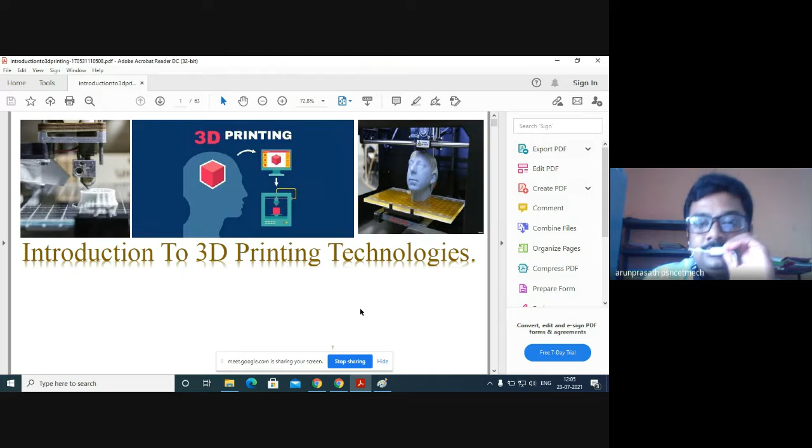Now we are entering into the concept of 3D printing technology. I hope my screen is visible to you. Before we enter into the concept of 3D printing, we need to know some basics of it.

You people may be aware of so many concepts related to 3D printing nowadays. You can see it anywhere, or in any application areas you can hear people speak about 3D printing. So guys, before we start with the concept of 3D printing technology, we must understand what is 3D printing.

In earlier days, people used to draw components by means of scales and pencils. There were specialized persons called mechanists. That mechanist would draw all the components of elements we use nowadays, for example connecting rod or piston, whatever it may be. These connecting components were drawn using scales and pencils.

But then later, people discovered so many design softwares like AutoCAD, SolidWorks. Nowadays we use Creo Elements, and Autodesk Fusion 360. So all these softwares were developed later.

In the initial stage of this area of design, people had only two dimensions, X and Y. We could draw whatever image or component, but it had only two dimensions. Later, people developed further stages through technological development.

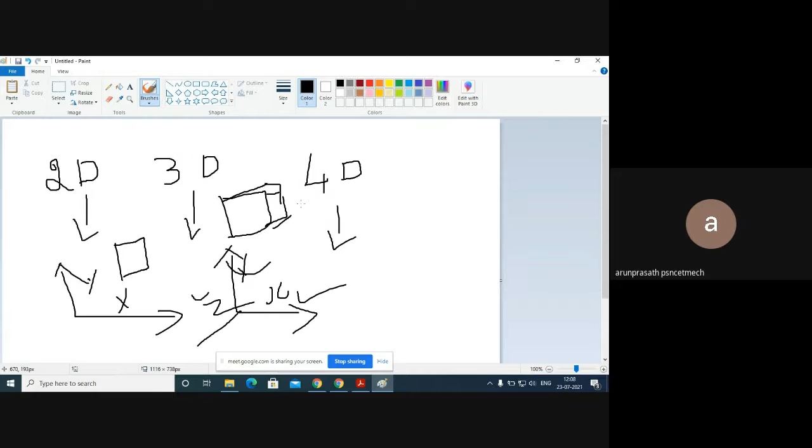3DP technology is where we see that component in three directions, X, Y, and Z. In these three directions, we can see how the component is really available or how it really is after the design stage is completed. Because we simply design in the design stage, giving all the dimensional details for the drawing. After the dimensional details are given for the drawing, through this 3D printing technology we have that model in our hands.

Once we see the live model, we get an idea of whether we need to improve any design changes or not. We can see the component lively, and then only we have that idea. So for that purpose, people initially developed the concept of 3D printing.

3D printing is also called rapid prototyping. This 3D printing and rapid prototyping both have the same meaning, but these two come under the concept of additive manufacturing. Additive manufacturing is the principle, and 3D printing is the application of that additive manufacturing.

Now the trend is 4D printing. 4D printing is where we print following the same process as before, up to the design stage. But after the printing is completed, what happens is the material gets deformed.

You people have heard about shape memory alloys. Shape memory alloys are where we can apply any disturbance by means of heat or by means of a cold environment, and it turns to deformation. If I apply heat, it will deform. Then if I apply reduced temperature or a cold environment, it gets transformed into a newer position, or it comes back to its original position.

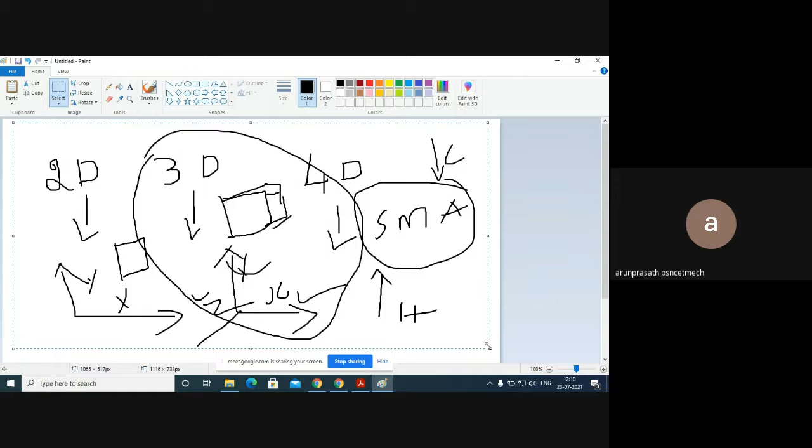Introduction to 3D printing technology, where I give you the basic introduction. The reason people prefer this 3D printing technology is to visualize the component of the design. Once we have a component in our hand, we have some idea. Another important thing is that 3D printing technology doesn't require a big structure at all.

While we see our 3D printers, it looks like a common printer what we use in our office. The process is completely changed, but it just looks like a small printer. We can print the component instantly.

This technology is very new, and we have the outlook that it is possible to get the component exactly as it is. That is the main advantage of this 3D printing.

Then we can reduce the material wastage. Once we are moving with our normal machining process, because you people are from a mechanical engineering background, you may know about the basic concept of machining, whenever we are going to create any component.

For example, we can take a lathe. In that lathe, if you are doing some shaping, you can do plain turning operation, turning operation, or facing operation, whatever it may be - it happens only due to material removal. I hope you people understood what I am saying.

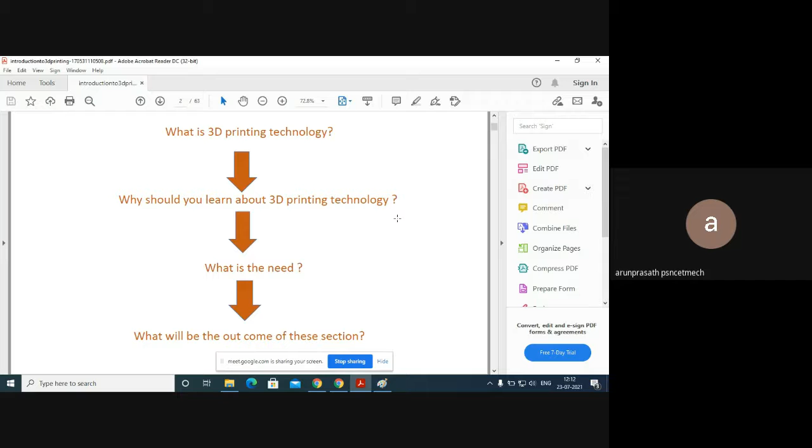It only follows material removal. If I want to put a hole with a drilling machine, there is material removal, and the hole happens in that piece of material. But this 3D printing technology is not like that. This is called additive manufacturing technology, a technique which helps to reduce material wastage.

That other technology is called subtractive technology. We will discuss this difference between additive manufacturing and subtractive manufacturing in the forthcoming slides.

Now listen, this is the history of our 3D printing. 3D printers were first introduced by Hideo Kodama, a researcher and scientist from Japan, where he discovered this. He first coined the name 3D printer in the 1980s in a Japanese lab.

The first 3D printer they introduced is called fused deposition modeling (FDM), in the 1980s. Later, by 1984, Chuck Hull, who worked at 3D Systems Corporation in America, discovered a stereolithography machine in the year 1984.

This stereolithography machine uses photopolymers. Normally, photopolymers are polymers which can be easily cured with the help of ultraviolet rays, because ultraviolet rays are lasers - we can easily cure this polymer at the time of printing.

This is some basic history of our 3D printers. Later, so many techniques were developed. Initially they started with fused deposition modeling, then lithography was introduced, then within that, laser sintering was introduced, then laser stereolithography, then inkjet printing technology. There are so many printing technologies introduced using laser, and many technologies introduced later.

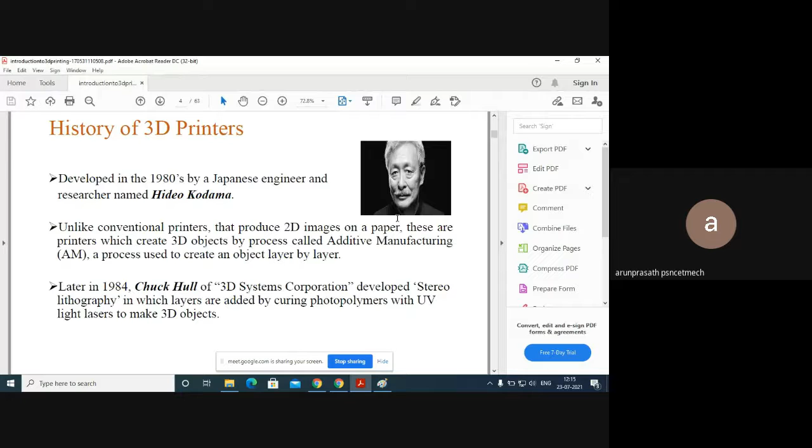First, we need to understand what is the 3D printing technology, how it works. So guys, don't hesitate to ask any doubt with me. If you have any doubt, please share it with me in the chat box, otherwise in the comment box.

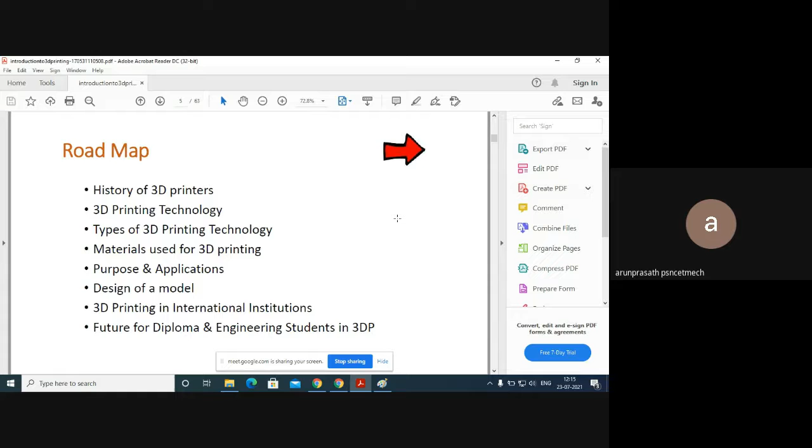This is the roadmap where we are going to see something about 3D printing in this video. Initially we discuss history, then technology, then types, what are the materials, then applications, then it moves with some of the areas.

By the 1980s to 90s, the 3D printing machine slowly entered into the real world of application. Initially only mechanical people, especially those working in automobile industries, created this component for their study. But later, by 1980s, and nowadays up to 2000, 2010, we are having this 3D printing technology in all of the areas. It's not limited.

You can take any field - you can simply enter into the aerospace industry or marine industry. Some small gadget components, people are developing using this 3D printing technology. These 3D printers have the ability to print metal also - that is called laminated object manufacturing. In this LOM technique, we can print simple metals also for our purposes.

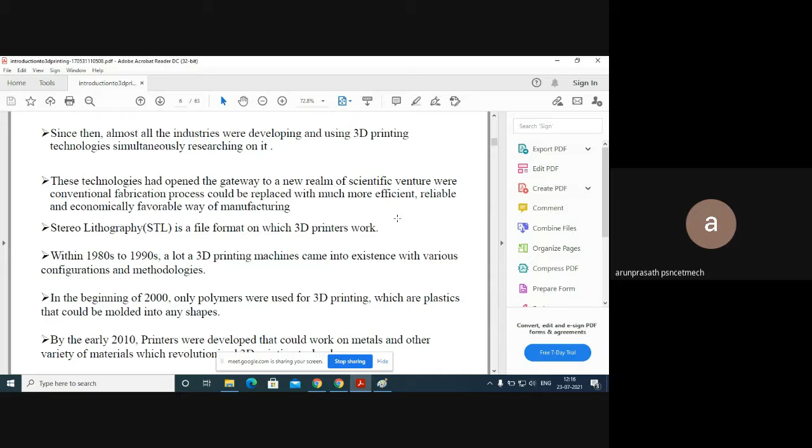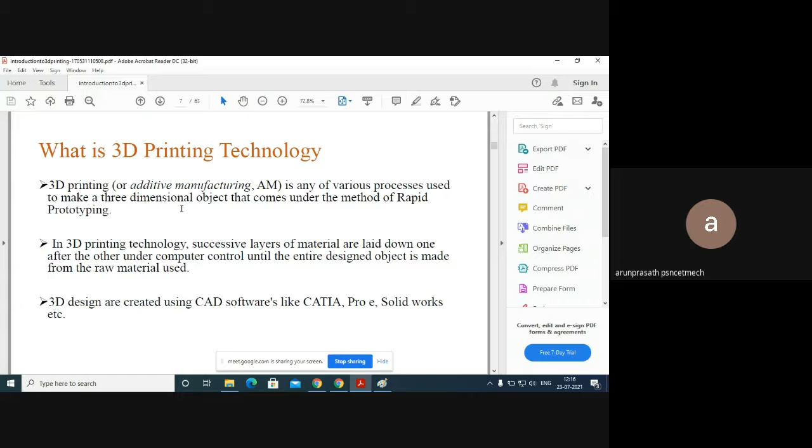Before going into the real concept, there is some basic procedure - how the 3D printing is developed. You people know, by means of this video, we have the 3D printer with us, we have the printout, the component outside and everything. But the real concept is there are two processes involved here.

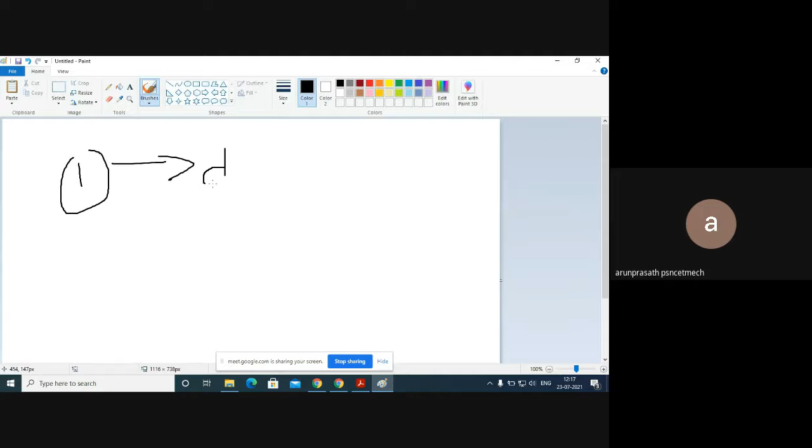Process number one is we just design our part. For the design of our part, we can use SolidWorks. Okay, we can use this... wait, I will just enlarge it. We can use SolidWorks, or we can use CATIA, whatever may be - CATIA, SolidWorks, Creo Elements, or Autodesk. So these are some softwares available for the design.

While taking this design, guys, we need to separate the design into two categories, because the software may differ based on the application, since we develop softwares based on application. So we have SolidWorks, Creo, and AutoCAD for the design.

After design is completed, we need to see the motion of the components, after the application. Before moving to the application, we need to analyze how much stress, how much temperature, or how much amount of load it can withstand. For that analyzing purpose, we have analyzing software, example ANSYS, CATIA, even though.

Then after all this is completed, we need to see the output by means of manufacturing. For that purpose, we are using CNC and 3D printers. So this is the hierarchy - once we follow this hierarchy, only then the total system is going to be completed.

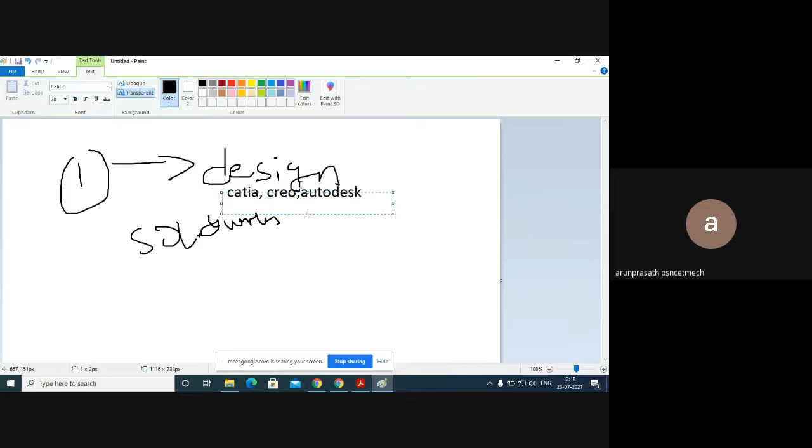Now listen to me. So first, we need to draw our diagram with the help of these tools. Once the diagram is completed, the second step is to import this diagram to a separate software that accesses the printer. The software is used to access the printer. Here only the design is completed.

Once this diagram is imported to the specialized software called Maker's Cura - one of the 3D printer softwares - we can extract information like how much amount of material is required, how much time is required, all the information, just like in CNC machining. Once you upload a component in CNC machining, you can see all the things in the display. Similarly, once we import the image through Maker's Cura, you can see how the image is printed, how much material is required, everything.

Not only Maker's Cura, so many softwares are available. Maker's Cura is one of the predominant softwares preferred by industries using this 3D printing technology. Once we import here, we can get all the information, then finally we can get our printed component.

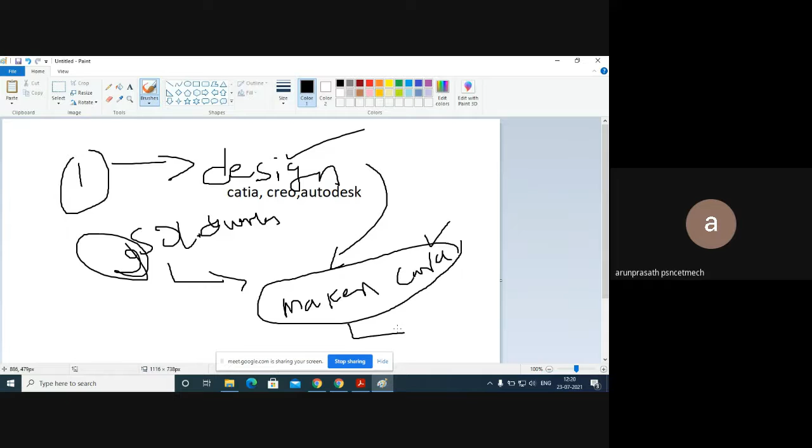The only drawback of this 3D printing is time. It took more time.

The reason for this is a concept called meshing. Meshing creates some internal structures, and you can see the structure is very fine, giving good compactness in the product. If the structure is very fine, the material strength is very good. If the meshing is not done correctly, we fail in the technology, and the material doesn't withstand the amount of load we require.

Creating this type of meshing in the component takes some time, because it creates a square shaped or honeycomb structure. So it takes time to create that structure, but then the build quality of the material is very good. That is the only drawback of 3D printing.

But if you want mass production, that is also possible. You can run with multiple machines. That is the only solution available so far.

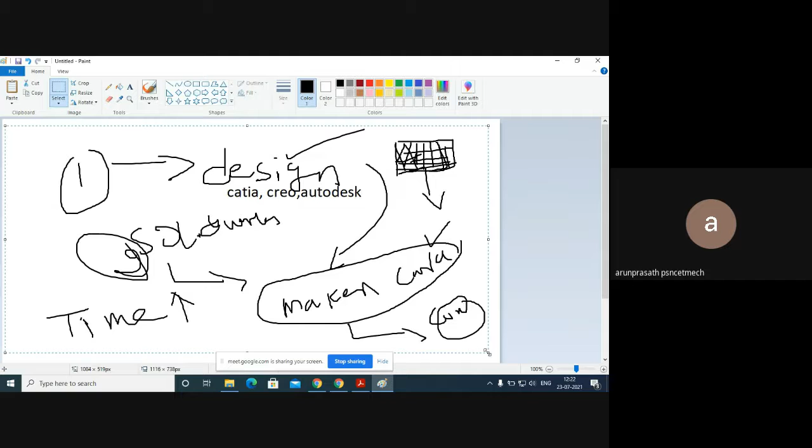So the first step is we draw the image with the help of some design software. Then we import that image through any of our 3D printer software to see other information like how much time is required for printing, how much material is required, what is the possible direction of printing, and everything we can clearly see through Maker's Cura software or some other software which can access our 3D printing. That is the image they give, first the virtual model, then the CAD model is imported.

Then it prints the object. For file preparation, each and every printer has its own file preparation. Normally the default file conversion is .stl. The .stl format is the format where we are saving our CAD files.

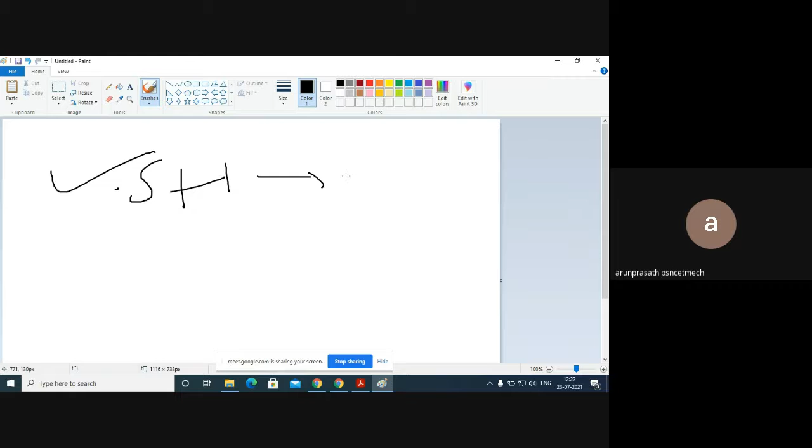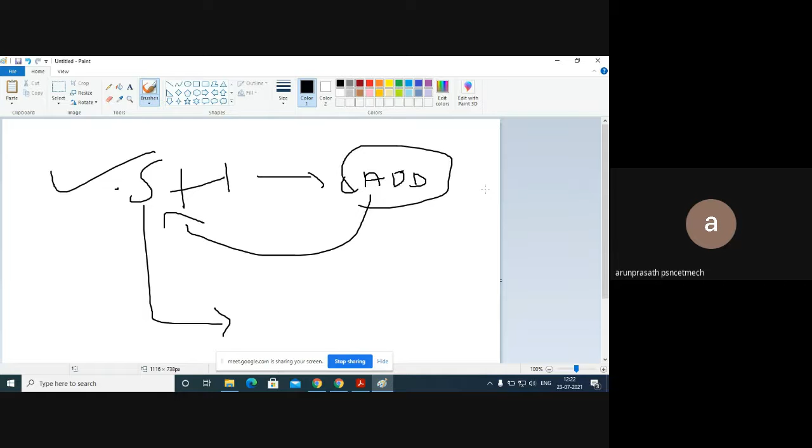CAD files can be stored in the form of .cadd or some other extension, where this file is converted to .stl. Then only it gets imported into the Cura software or whatever software we are using. So that is the concept of how they are creating it. Don't get confused, guys.

But nowadays the technology has developed where CATIA is interlinked with printers, where we can draw and directly connect the printer to our CATIA software and print it. It's possible, but only CATIA has the accurate license with 3D printer developers, where Cura 3D printing technologies give that access to CATIA, till now.

But in the forthcoming days, all the things will be very easy for us. We can expect this technology where there's a connection with all of our design software, with no separate software to split this into two stages. We can draw, and we can print through our printers.

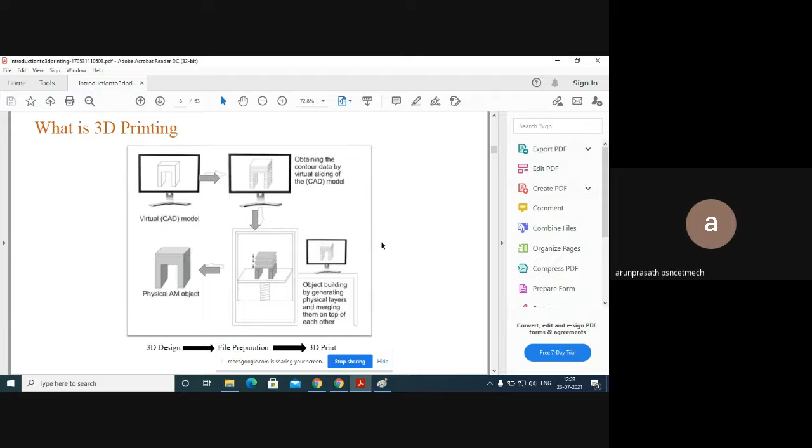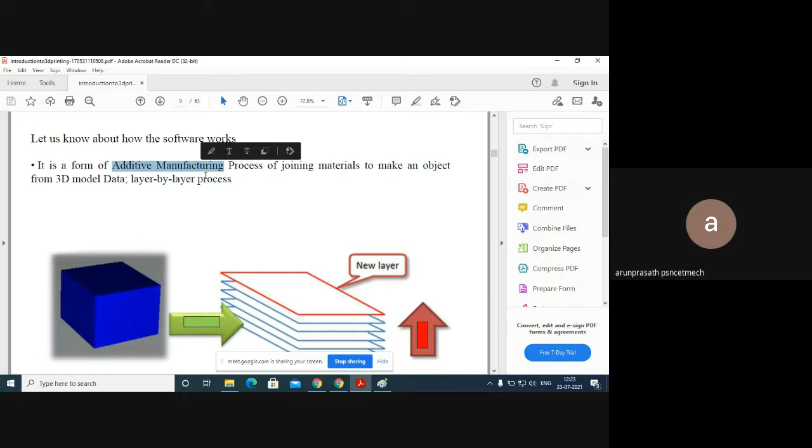So guys, this is additive manufacturing. Earlier in our video, we discussed the concepts of subtractive manufacturing and additive manufacturing. I'll give you a very good example: additive manufacturing is the technology where it creates objects layer by layer like this, including that meshing I spoke about.

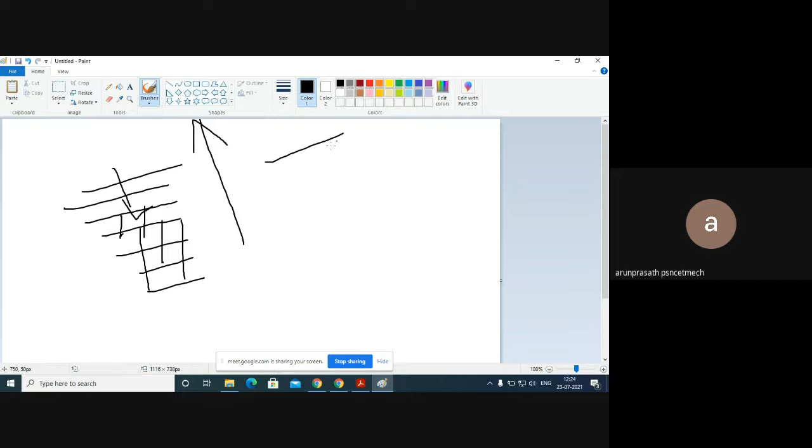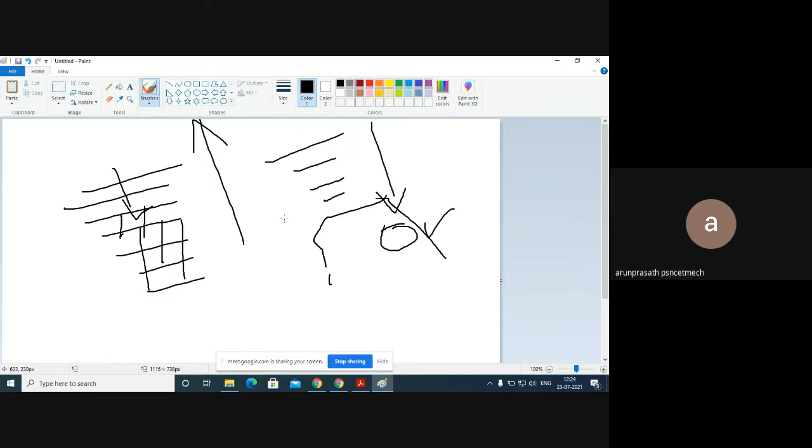This is called additive manufacturing, where the component is created like this. But subtractive manufacturing is like this, where material removal happens. After the material removal, we get the extra part as waste. Here there is no material removal and no excess material required for building. Only the material needed to build the component is produced. This is the difference between additive manufacturing and subtractive manufacturing.

Guys, that's the diagram where they are showing this. This is the complete model, showing the layer formation of the model. Then there's another technology, without doing drawing and everything - the scanning technology. Simply, scanners are available.

We can scan this technology, and people have implemented it in making prototype models. If I want to draw a statue, or print a statue of one of our leaders, we can use this scanning technology simply without drawing. It can give all the images, these images will be loaded on the screen, and we can easily print it through our printers. This is one of the technologies.

Then the material we are mostly using, guys - these 3D printing materials are preferred towards plastics. Plastics in the sense that plastics are classified into two categories: one is thermoplastic, another one is thermoset plastic.

So most of our 3D printing materials are plastics. Among these plastics, some biodegradable plastics are available like PLA, and ABS - these are biodegradable plastics that people mostly prefer, like PLA, ABS, nylon. But depending upon the application, guys, please listen, these materials may change.

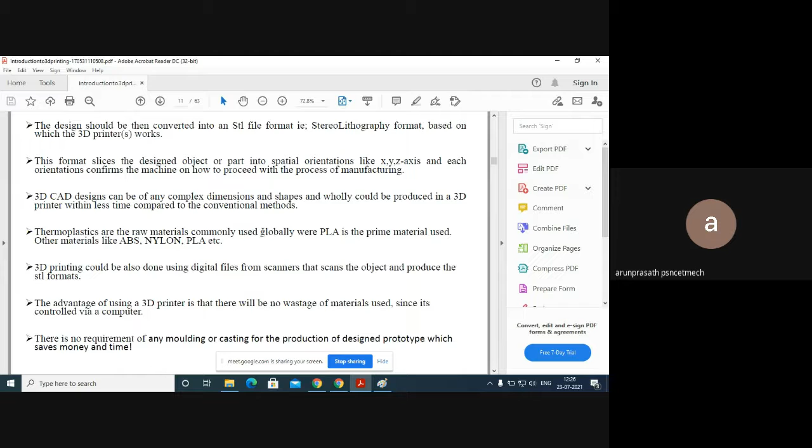I already mentioned in the introduction that we are using metals for printing also. This is some example for this one.

This diagram represents additive manufacturing and subtractive manufacturing. In subtractive manufacturing, material is removed - the required amount of material only stays back, and the remaining material comes in the form of waste. In additive manufacturing, there is no material waste. Obviously, compared to subtractive manufacturing, additive manufacturing has very less material waste.

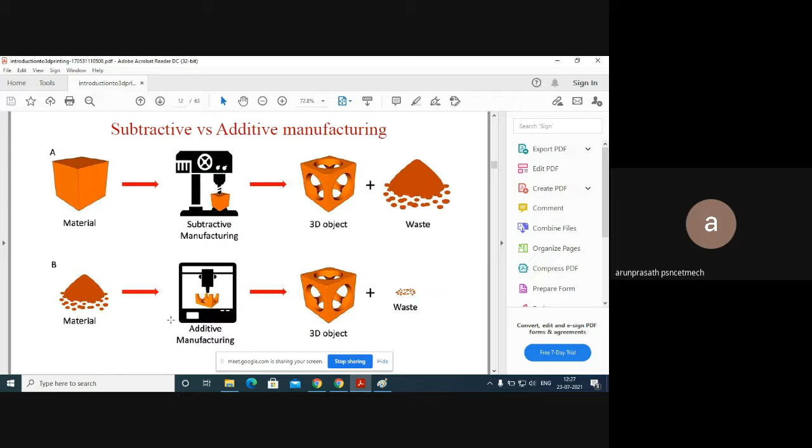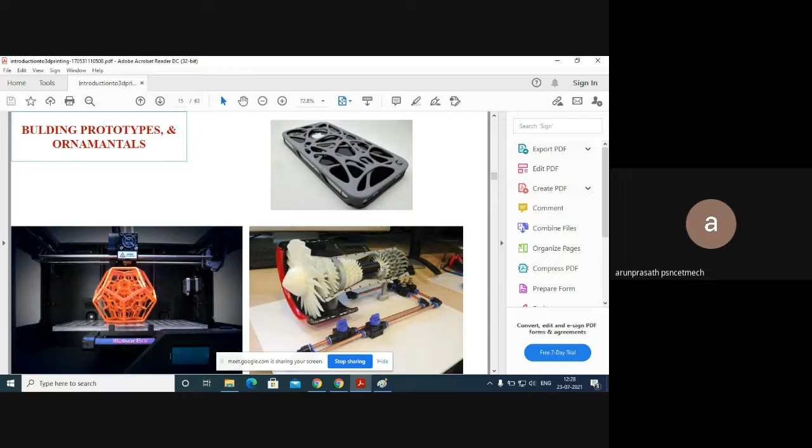This is a 3D printing prototype of a turbine, where we can use it for the propellant of our rockets - so all these areas. They show some applications of 3D printing where we can have artificial bones also - we can create artificial bones and everything. Even the technology has increased where we have the artificial functioning of the heart also. I will show that video in the later slides.

Okay guys, please listen. The common 3D printing technologies are fused deposition modeling, laser sintering, stereolithography, and PolyJet. From these basics, there are so many components.

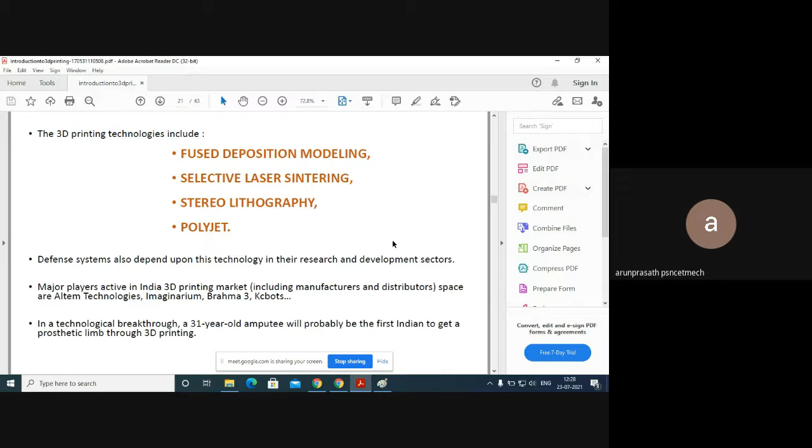That's why we are seeing the basics. The technologies we are seeing first is fused deposition modeling, where we have two extruders. In the two extruders, we simply have materials where the extruders absorb the materials and print it like this.

Then selective laser sintering, where we have a bath - in that bath, we have liquid polymers. We simply capture that image through a scanner or any design software. That image is imported, and the scanner passes the image towards that liquid bath. Once the laser is passed through, it is cured.

Then powder binding - the same technology, but instead of liquid we use powders. For binding we use lasers only. Stereolithography is where we simply dip the material into a resin, where we dip our component. Here also, laser plays the main role.

We simply directed the laser into that liquid bath, and that liquid bath printed the final component.

The resin is one of the polymeric materials. People use this resin for binders in the polymer matrix composites. Binders are agents which help combine materials, like a gum, so don't get confused.

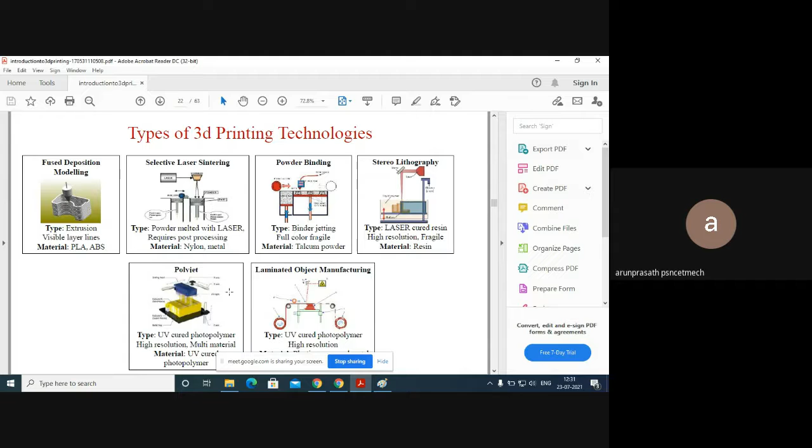In later videos we will discuss in depth what 3D printing technologies are available. Same concept, I'm explaining with the image.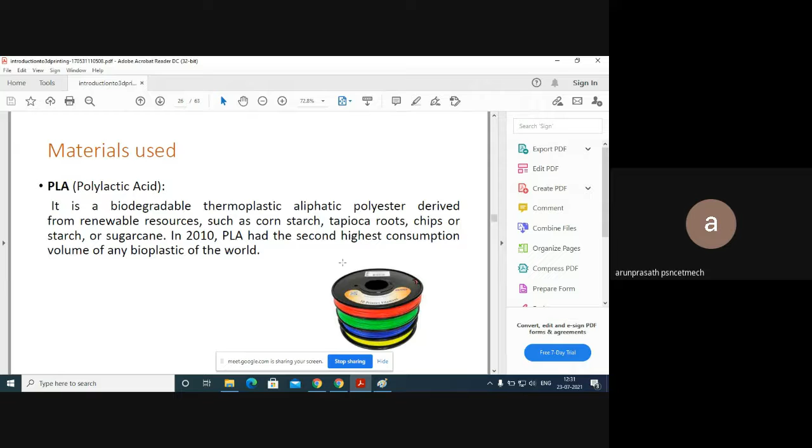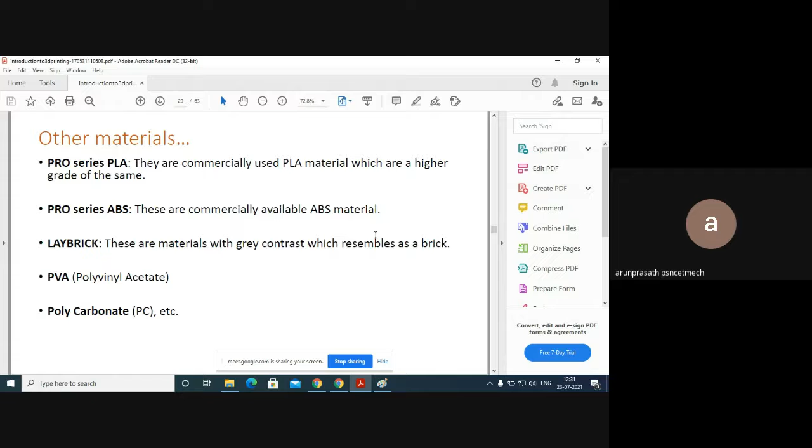The material normally preferred is polylactic acid. For 3D printing, most components use PLA and ABS. As I said earlier in the start of the video, the material may differ - there is no fixed material for this process. Based on the application, we can change the materials. There's no constant concept for the systems.

In the area of applications for 3D printing, we have electronics. We can manufacture sensors, PCB boards, and sensor mounting elements - everything can be printed with 3D printing models.

In the medical area, aesthetics, prosthetic arms of the human body. We can also print small pieces of bones and whatever may be needed in the form of replacement.

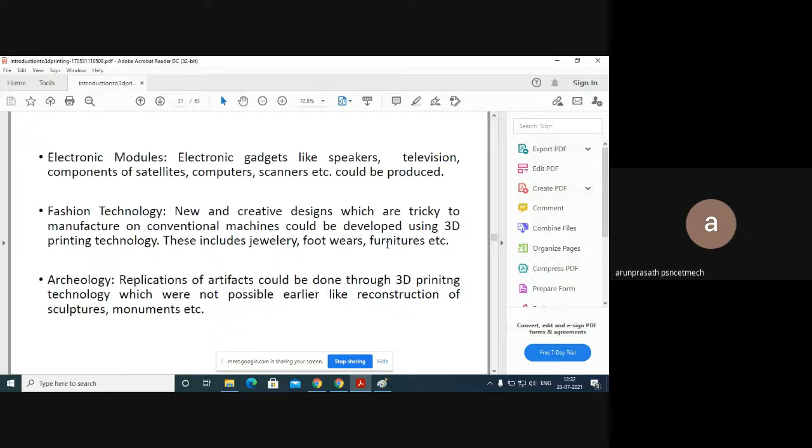These are some frontier developments of 3D printing technology, as well as in areas like fashion technology, archaeology, and automobile industry. The largest percentage of utilization of this 3D printing technology is in the automobile industry, then aerospace industry, industrial designs, and packaging industries.

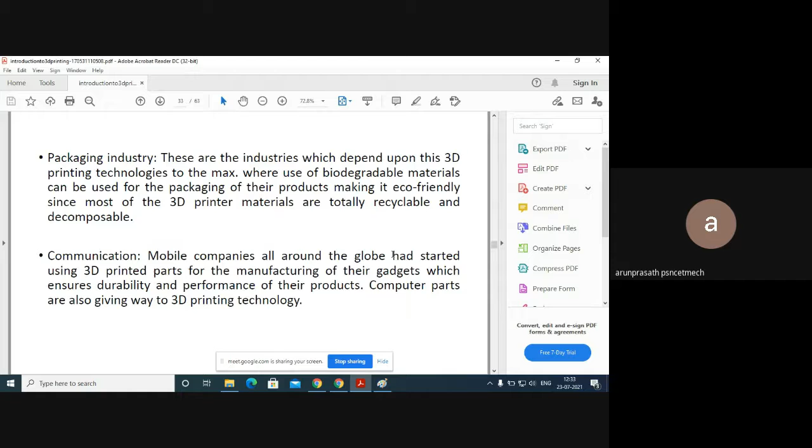Biodegradable materials are one of the latest trends nowadays. People are looking for biodegradable material replacements for plastics. So we can print some PLA components through this biodegradable concept and use them instead of plastics.

Then computer gadgets - these are some basic application areas. So what components are there? Already I mentioned in fused deposition modeling, there's the extruder.

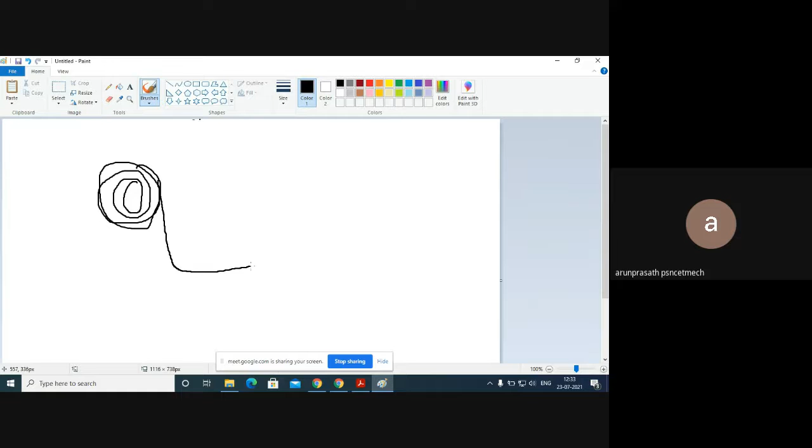The extruder is a roller-like structure, where we feed the material like this through a roller. We feed the material, and through a spinner, the spinner passes the material into the bath. Then by applying a laser or whatever component, we start our printing.

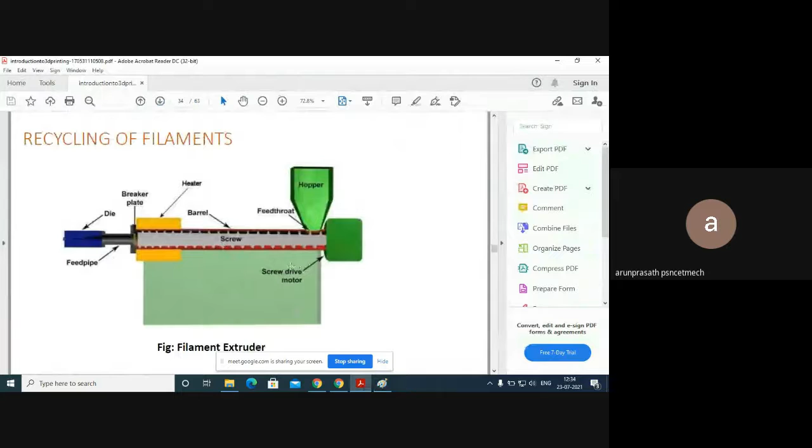This is what normally happens here: a barrel screw, a feed pipe, a screw drive motor - these are normal things available there. Then some other parts such as stepper motor and servo motor are normally available.

I hope you know the difference between stepper motor and servo motor. A servo motor has direction of rotation in only one direction, either clockwise or anti-clockwise - normal motors like what we see in our fans or real-time motors used in borewells.

This is our servo motor. But the stepper motor, while similar, can rotate in pieces - step by step. A good example is escalators, where people prefer stepper motors because the rotation and operation happens step by step between intervals - first rotation one minute, second rotation two minutes.

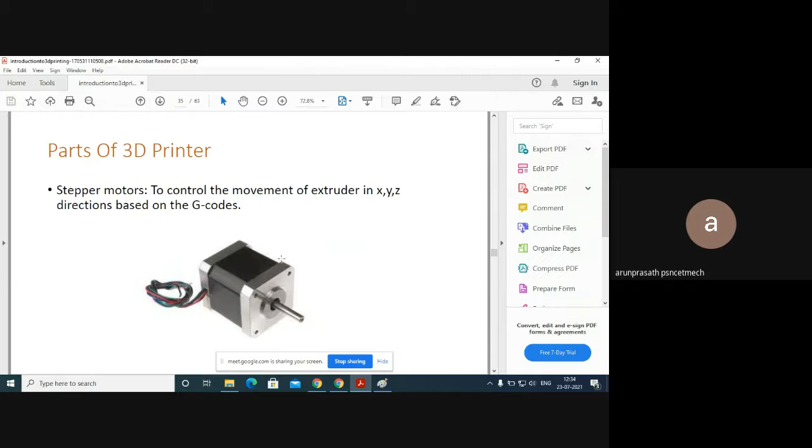Likewise, between the intervals, this stepper motor rotates. Here we are using stepper motors and the inductive sensor. The sensors may differ, guys. There is no constant sensor design for a 3D printer. Based on the purposes we have, there are so many sensors available.

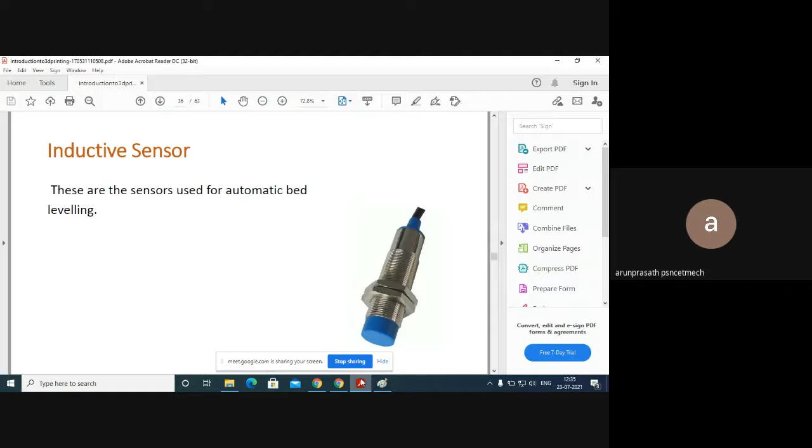If we want to locate the temperature, we use a temperature sensor on the bed. Actually, we'll see that 3D printing structure in a later video. So we need to analyze the temperature of the bed.

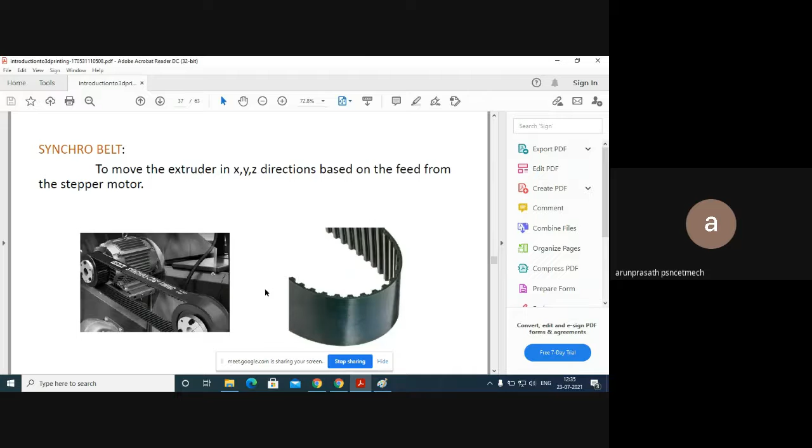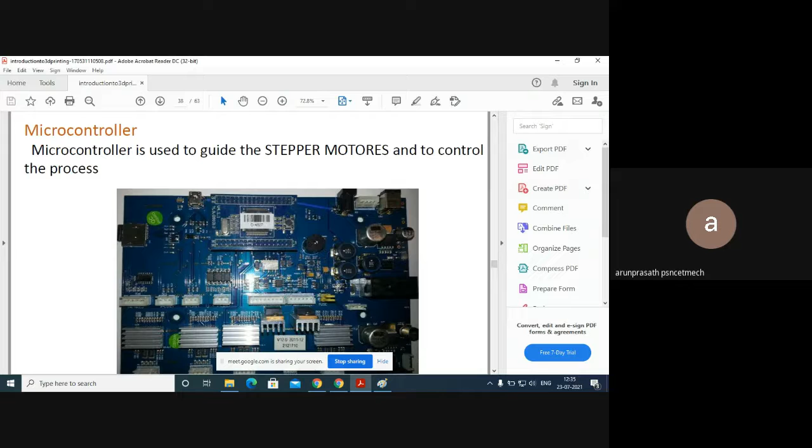This synchronous belt provides the connection for movement, because we are looking for axis movement like this. So this belt acts as a direction control between the microcontroller unit which controls the motors. Purely, it controls the motors. Then the shaft acts as a mounting element which controls the rotation of the motor.

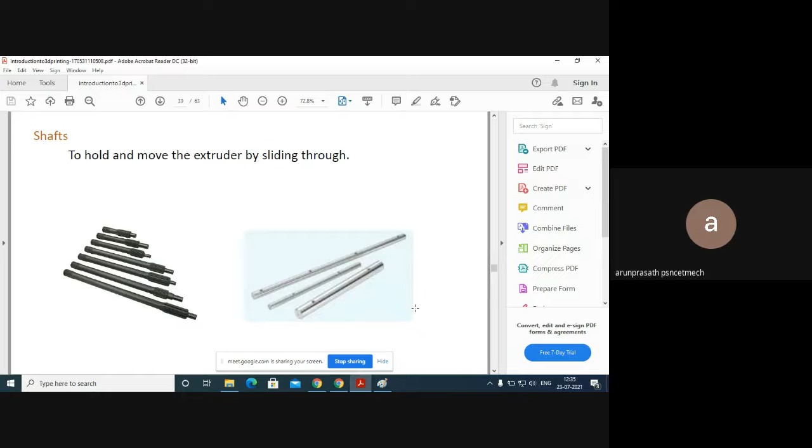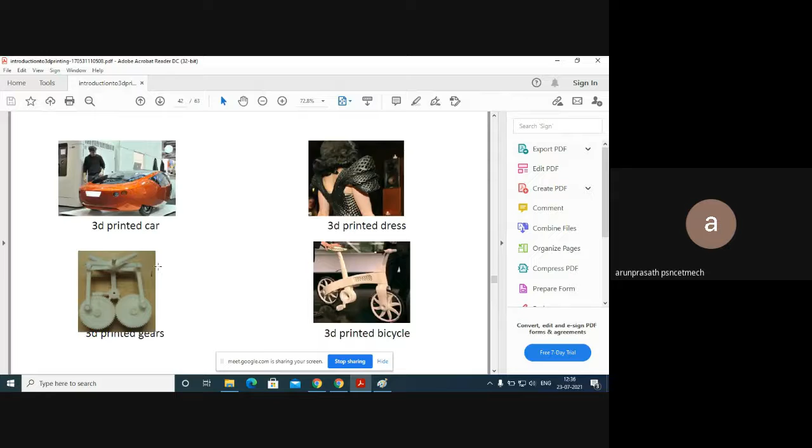The temperature indicator sensors - some examples of 3D printing parts are in the textile area, 3D printed bicycles, cars. Some of the component applications you may see here. There are a variety of applications available.

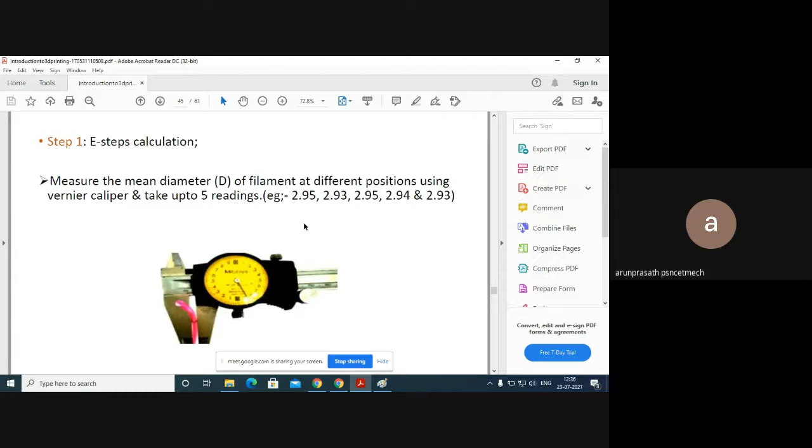Once the design is done in the software, we need to save it in the STL format, because as I already said, STL is a universal format used for whatever is printed. We save the 3D printed image in the STL format, then import it into the slicing software.

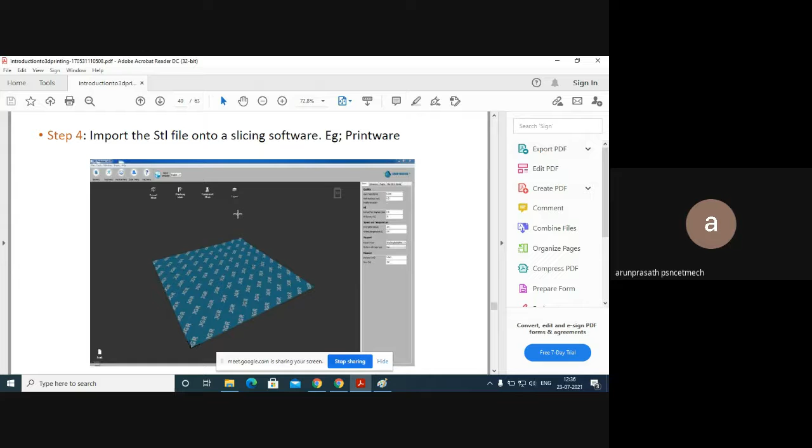The software is called slicing software. As I mentioned, Cura is one of the slicing software. In the slicing software, we simply import this image and we can see all the information - time for printing, material required, way of printing, and how much material is required. All the information we can simply see.

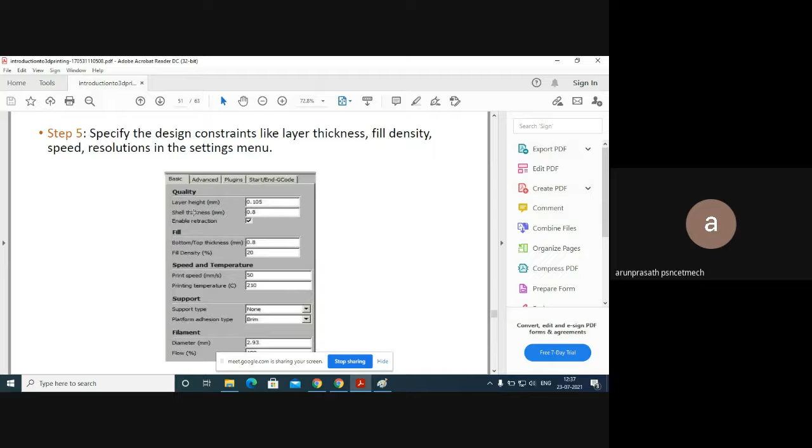This is simply the layer by layer formation. The information available here shows how much quantity, what is the bed speed, filament diameter, and dimension information. Then everything is completed.

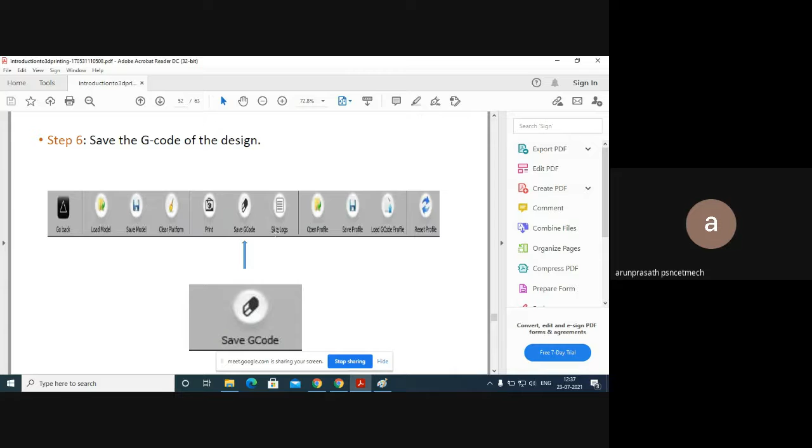Simply we can save it as G-code. This G-code is geometry code used for printing. After completion, in earlier days people had a separate tool, but nowadays we can have a direct connection for printing. The printing happens and we can easily get our components.

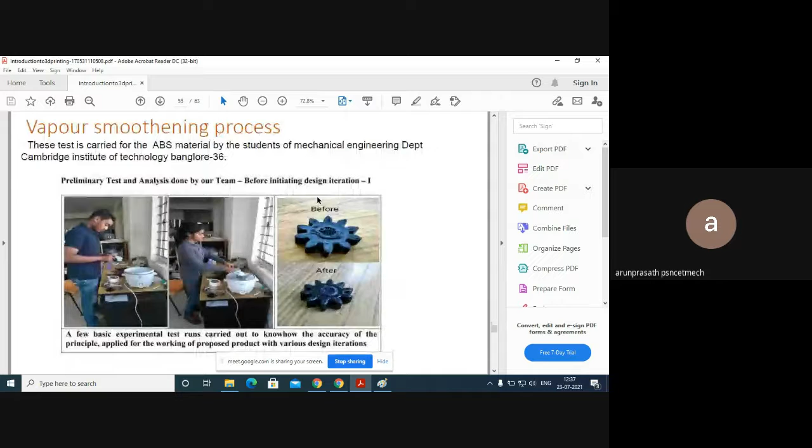Then there's the vapor smoothing machine - one of the advanced technologies where ABS printed components can go through this process. Through this vapor smoothing technology, we can get very good output in the component after printing. This is additive manufacturing technology - there is no extra material removal required like in normal machining operations. After machining, to get smoothness we normally prefer grinding, but here that's not required. So we get very good output here.

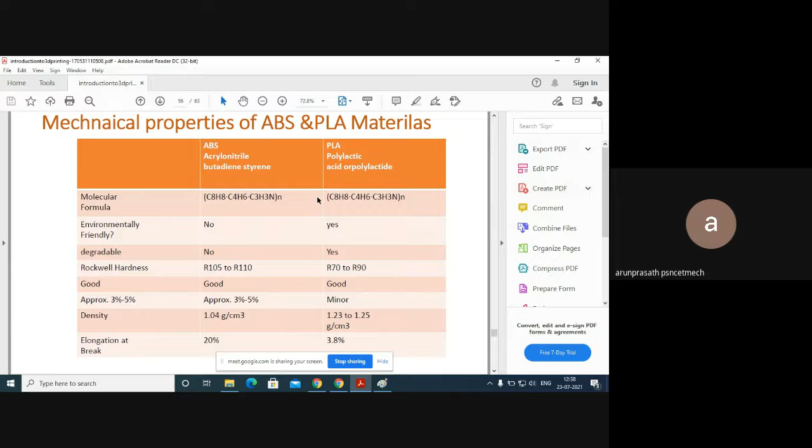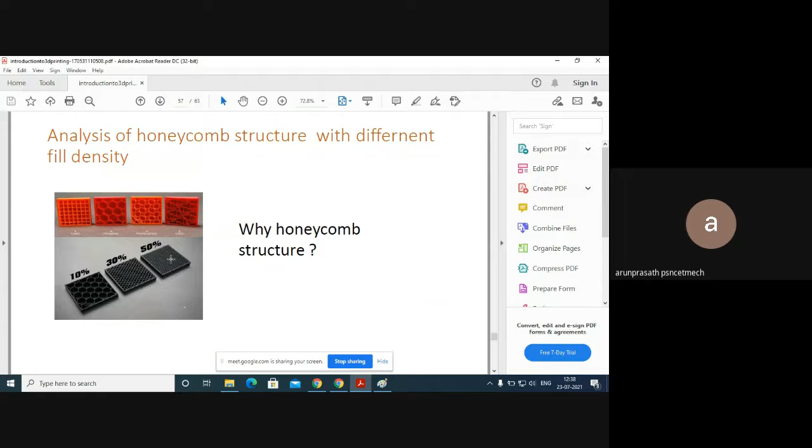This is the structure I want to show you - here you can have 10% meshing, 30%, 50%. Among these three variants, the 50% meshing of the component has very good strength. So again, the application plays the key role. If we want a very high strength application for the material, we can prefer a denser mesh. That's the concept here.

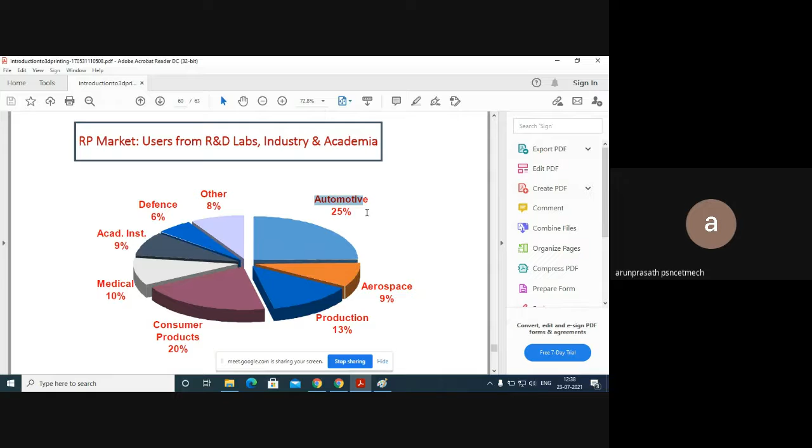Then some analysis here - the maximum users of this, as I already said, is the automotive industry. They use 25% of this 3D printing technology because they require lightweight components for their application. So obviously metals are not suitable, so we look for a replacement - that replacement is 3D printing components.

Most companies in all areas have adopted this technology, and in forthcoming videos I will also show you some case studies of who is using this 3D printing technology and what outcomes result from these 3D printing components. We'll see everything in the forthcoming videos.